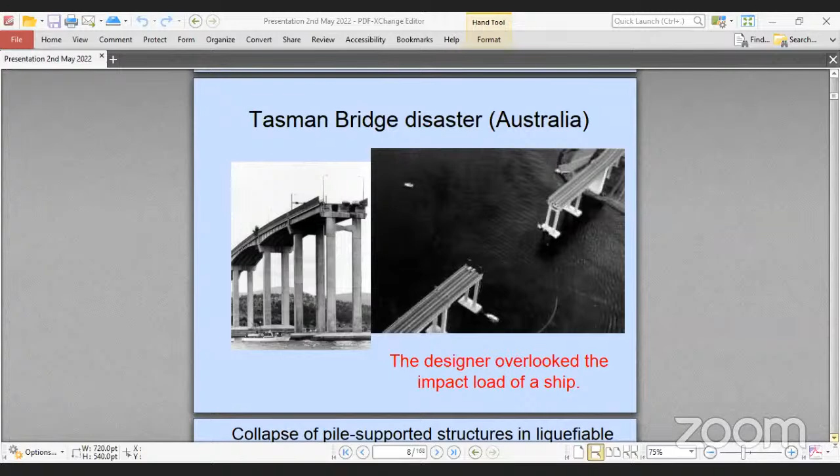Similarly, why I am giving this example, the very basic reason is that when we are doing the seismic design of any structure, whatever hypothesis available to us, based on that, the code was modified and we are using those particular codes. So my point is that every earthquake gives a new lesson, which is subsequently analyzed by the research community, and sometimes some particular hypotheses are being developed. So that's why there is no end to the concepts in seismic design of foundation, or you may consider a structure. Now, directly going to some of the case studies of seismic events, where we can see structural failures, especially bridge failures.

You can see this in different earthquake events. For instance, the 1964 Niigata earthquake, where the Showa Bridge in Japan collapsed just like anything. The central piers collapsed, right? Similarly, in 1964, another earthquake, the Million Dollar Bridge, also collapsed during the Alaska earthquake. Then there's the 1995 Kobe earthquake. And most importantly, in our country, the 2001 Bhuj earthquake also gave evidence of failure of some port structures which were supported by well-engineered pile foundations.

So this gives a lesson. This is why I am mentioning these particular earthquakes today. I will show you most of these case studies, which primarily give an idea about the lessons learned from the failures of these structures.

And today we are in such a position that, following these particular evidences of earthquakes, internationally our code has modified a lot. So till now, and in future earthquakes, for mitigating future earthquake events, a designer should be aware of some of the hypotheses which should not be missed out, considering the importance of the structure lying in the seismic zones.

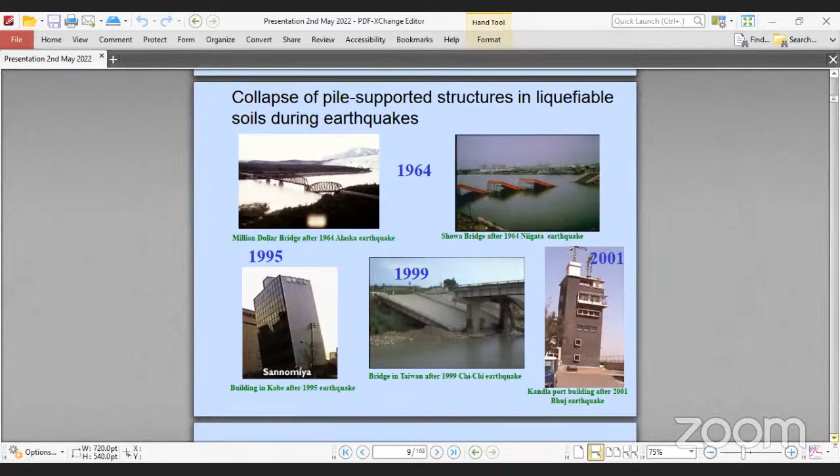With this, let me discuss some of the physics of the problem. All of you know that a building or bridge structure, a heavy structure, is supported on pile foundation. It may be an ordinary pile foundation, it may be a pile group foundation, whatever may be the thing.

Am I audible? Hello? Hello, am I audible? Yes, sir, you are very much audible. Okay, sir, you are audible. Please, sir. Okay, thank you.

So you see, all of you know this particular type of structure which is supported by well-engineered pile foundation. So today's talk, I will be mostly focusing on pile foundation. The reason is that the structures which are being withstood or supported by pile foundation form a very robust and well-engineered foundation. Even in soft soil, alluvial soil, these particular types of foundations are often used for supporting structures.

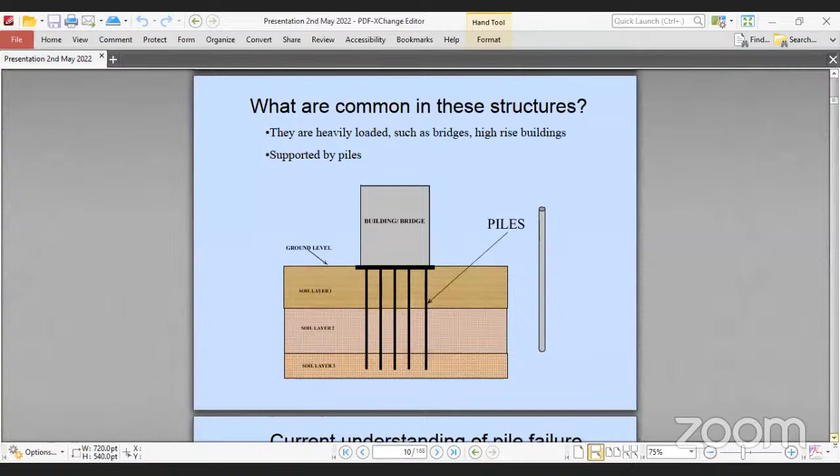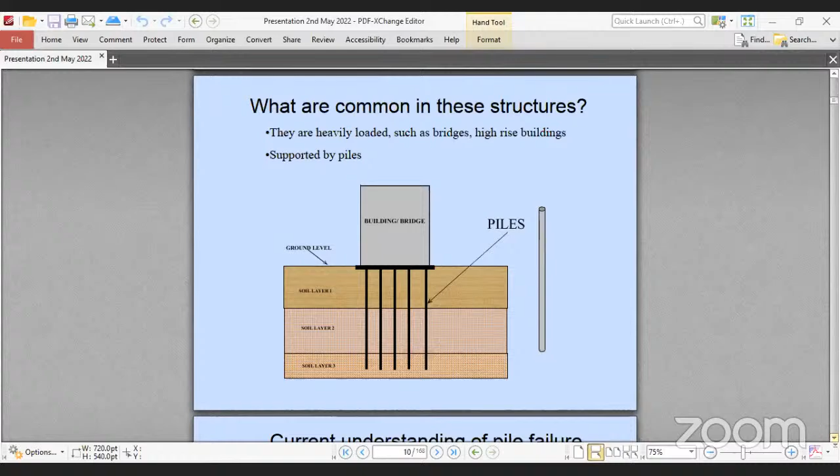So what is common in these structures? Pile foundation slender members are there, then supported by raft or sometimes a pile cap, and the building above. So a complex mechanics happens, a complex interaction, rather mechanics, I would say interaction, happening over here during this seismic event. This is a complete dynamic interaction going on over here. If you miss out this interaction, it is observed that the reason for failures is because of missing these interactions. This is one of the issues.

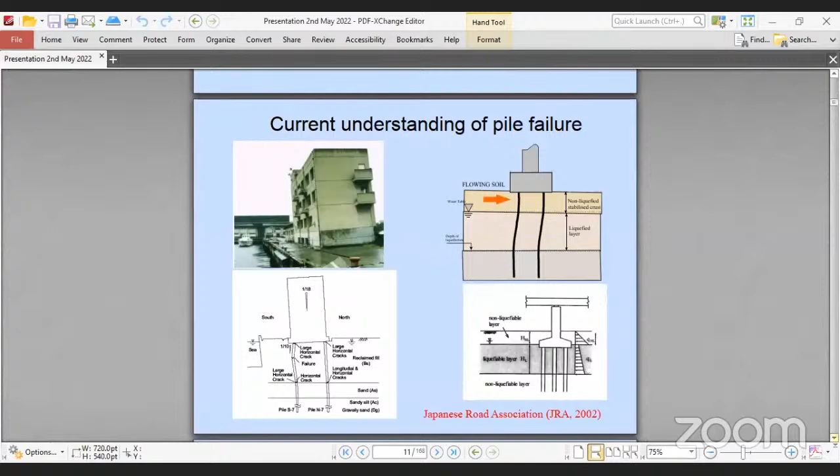So let us try to highlight this interaction part, the current understanding of pile failure, what the international code says about the failure, the present condition, present understanding. You see, if there is a deposit of liquefiable layer, hopefully you can see this is the failure of the Kandla port, or in case of Japan, I think this failure was observed, where you can see that a non-liquefied stabilized crust is there, followed by a liquefied layer.

In such cases, why has the reason of failure happened? Because some of the issues may not have been addressed earlier, and following this earthquake, this particular design provision has come up. You can see Japan first introduced this concept.

If you see the bottom figure, where if there is a presence of a liquefied layer, that depth is represented by HL. If there is a liquefied layer, then we should consider some thumb rule—they have given 30% of the total passive resistance we can consider as passive, because the passive resistance gets subdued when there is a liquefiable layer or liquefaction happens under certain conditions. And what happens?

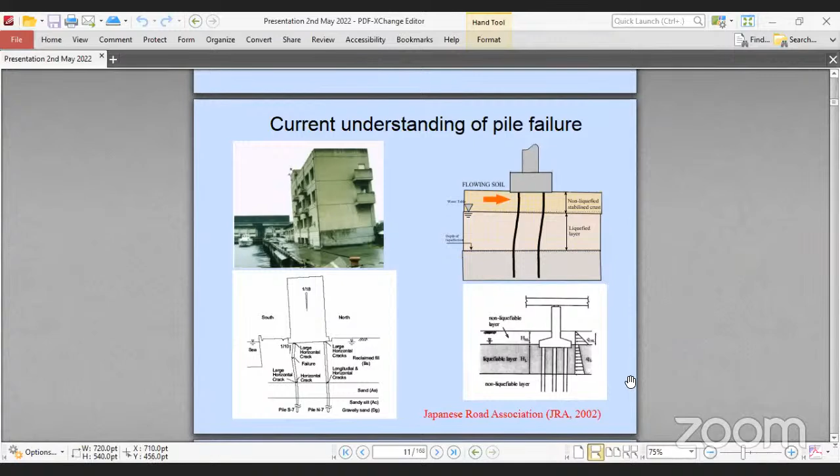This liquefiable layer gives additional stress on the pile, and the pile is generally not being designed for that additional stress conventionally, and that may lead to failure of such events, which you can see in the past.

Just following this particular slide, later I'll go in-depth into the matter. The Japanese code in 1996 identified the problem of the liquefied layer, where foundations are being designed considering 30% of the total overburden pressure as the lateral resistance. But ultimately it is found that this lateral resistance is questionable, which was published in 1996. So 30% of the total overburden pressure, right?

So presently people are arguing that this pressure should not be there and there will be no passive resistance, something like that. So if there is a passive resistance, generally a bending mechanism is going to happen. If you just forget about the passive resistance, then obviously the bending resistance will not come into picture.

I don't know why it is coming. Just a minute.

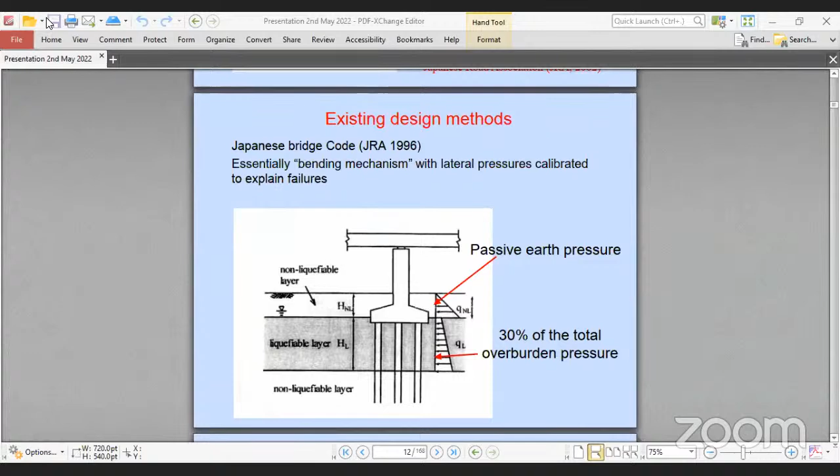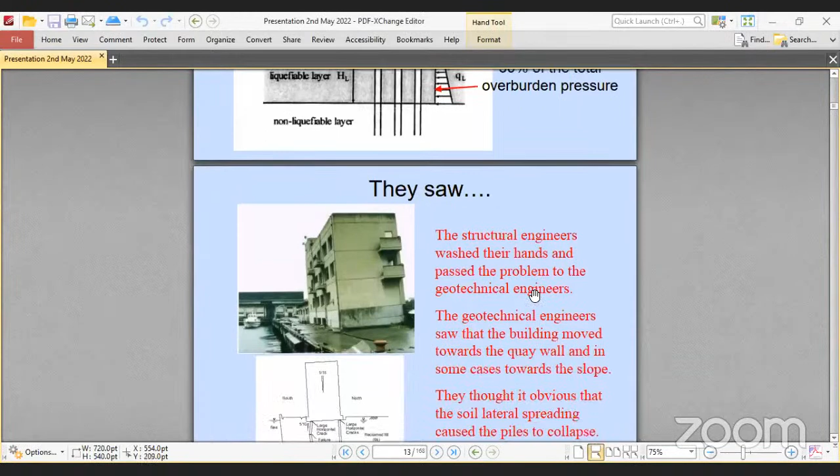Okay, fine. So these are the issues they saw. The structural engineers washed their hands and passed the problem to the geotechnical engineers. The geotechnical engineers saw that the building moved towards the quay wall and in some cases towards the slope. They thought that the soil lateral spreading caused the piles to collapse.

But actually, some of the mechanics that people identified after this Japan earthquake failure led to one term: lateral spreading. Lateral spreading is an event where if there is the presence of a liquefied layer, or over the top a non-liquefied layer which is lying on a slope, that gives a huge moment on the pile, a bending moment. That is called kinematic interaction.

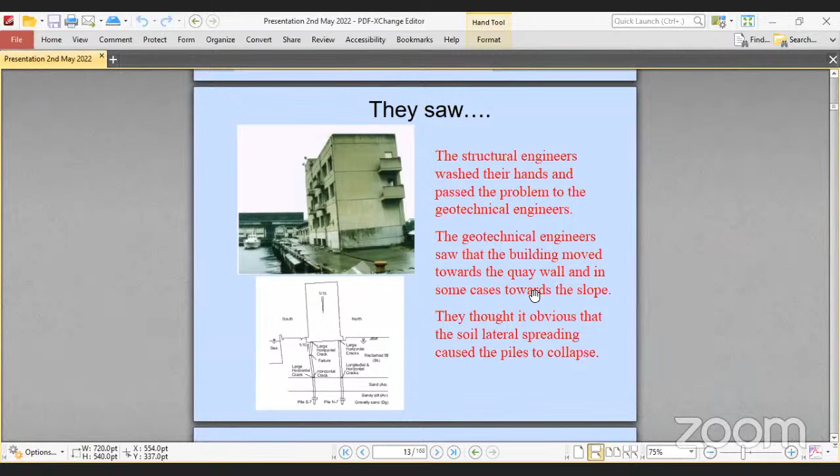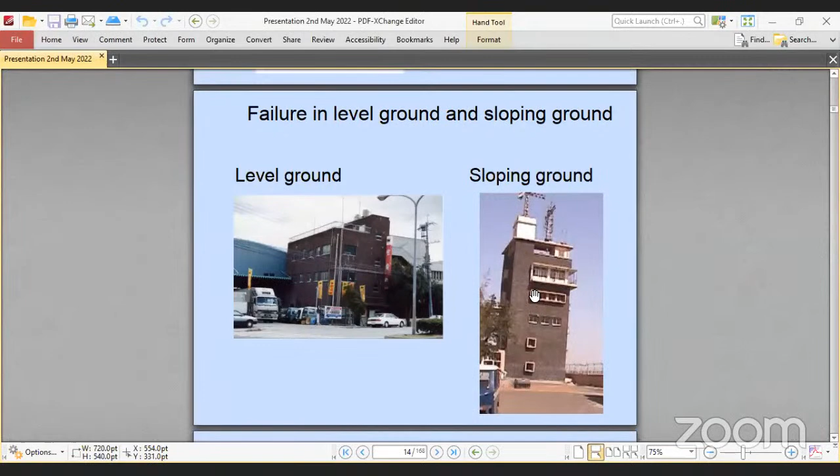So failure occurs in level ground and sloping ground. In level ground also we have seen several failures. In sloping ground, you can see the example of the 2001 Bhuj earthquake, which evidenced this kind of failure, caused by the subsidence of the pile, sudden subsidence of the pile at the bearing level.

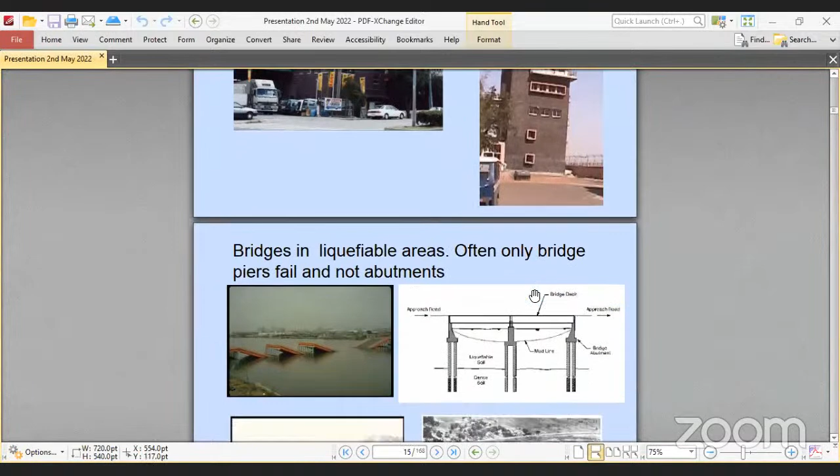Now, in bridges in liquefiable areas, often only the bridge pier fails, not the abutments. If you categorically observe these failures, the Alaska bridge failure during the Alaska earthquake, and the failure of the Showa bridge during the Niigata earthquake, the observation is that the abutments have not failed. Interestingly, the central piers have failed. So obviously people are curious about that.

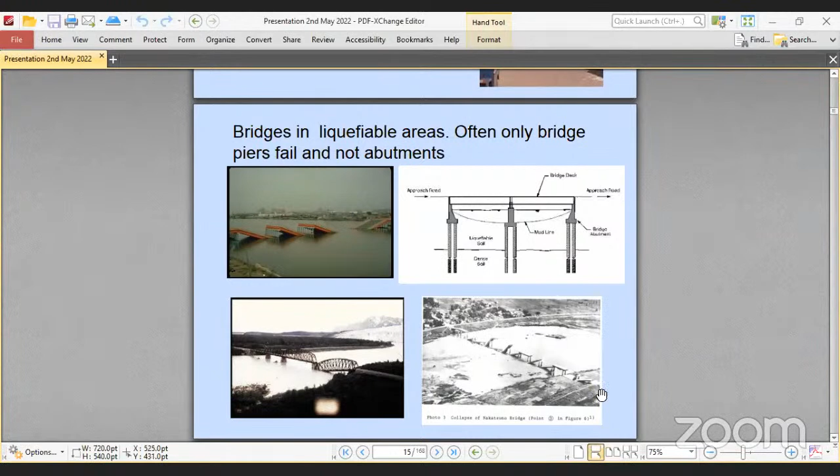What is the reason? You can see this figure is an old figure. In the Niigata earthquake, the central piers failed, not the abutment level. So people have tried to investigate the reason, and different schools of thought are available today with us.

Now check the factor of safety against JRA. JRA means Japan Road Association, which has given some basis of analysis for how you find out the moment capacity of the pile based on these assumptions. They checked, and found that conventional code cannot define the failure.

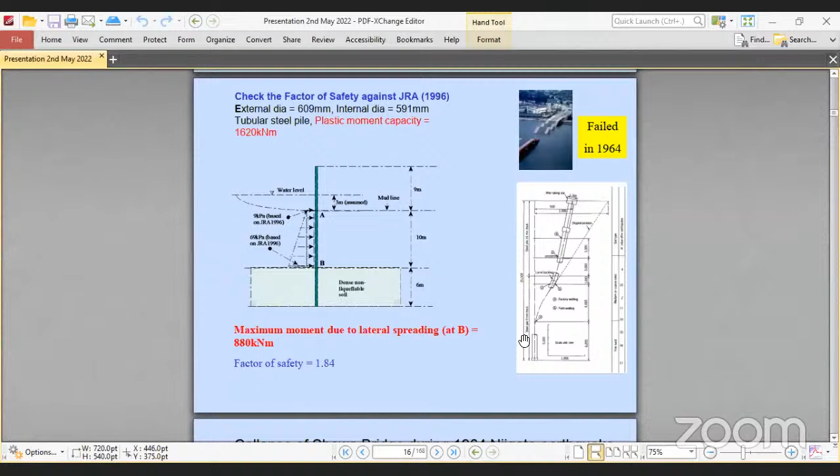Rather, some additional analysis has shown that there are some gaps which alone cannot define the failure mechanism. So finally, it has come out that some missing links are there.

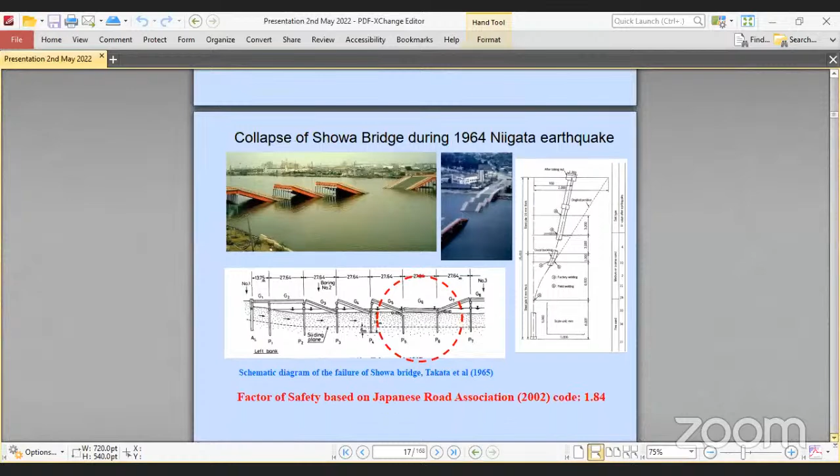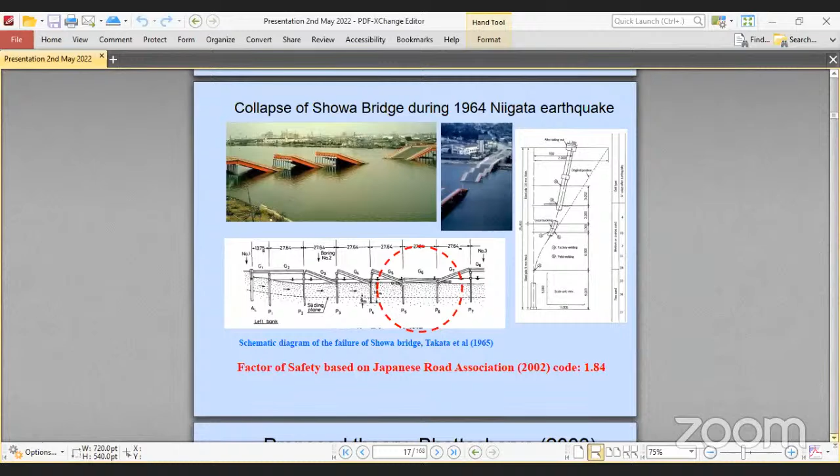You can see a good photograph over there, from the 1964 Niigata earthquake. This failure, you can see, the central pier has collapsed. There will be material failure of the piers, I mean the piles, the steel piles.

Now, based on these failures, Bhattacharya has done a lot of research in this direction. They have tried to give several ideas about the failure of the pile foundation, from which some design guidelines have been framed. The first figure is showing...

if the particular subsoil layer is a loose sand deposit over which some non-liquefied crust layer lies, considering only static loading, then obviously the pile will generate skin frictional resistance and end bearing resistance, based on which the total structure will be supported.

On the other hand, if you consider the dynamic loading during seismic excitation, if liquefaction gets started, what will happen? Stage 2: shaking starts, soil yet to liquefy, pile acts as a beam member. Stage 3: soil has been completely liquefied, inertia forces may act, and the pile acts as a column.

So the question is, when do you consider the pile acting as a beam, and when does it transform from beam to column behavior? This depends on when the sand has been completely liquefied. So there is a transformation of understanding after these theories came up.

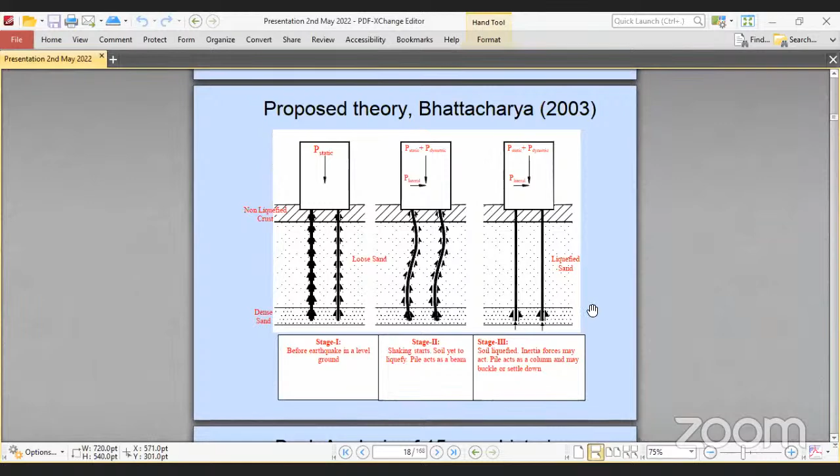So what actually Bhattacharya wants to convey - afterwards he has shown back case studies. Several case studies are represented here.

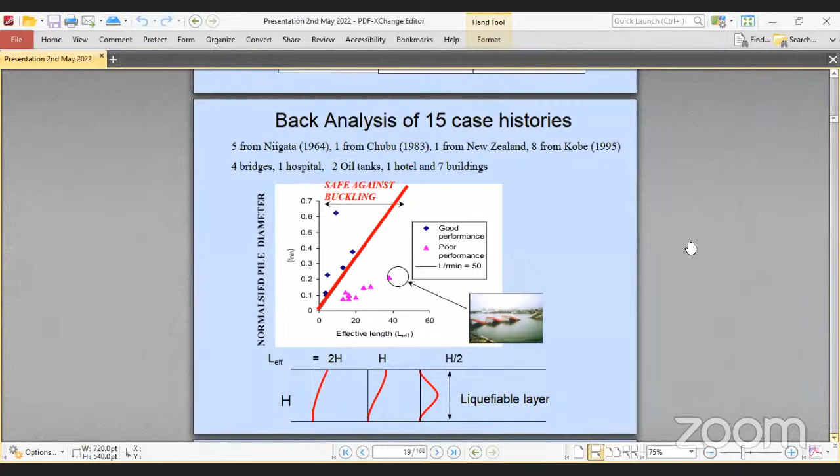Yes sir, okay. So back analysis of 15 case study failures was taken, and they identified the diameter of the pile, effective length consideration, and radius of gyration, trying to segregate two areas: poor performance of piles during earthquakes and good performance. From that they identified the effective length of the pile, and based on such criteria, they are safe against buckling - beyond this red line zone, it's not.

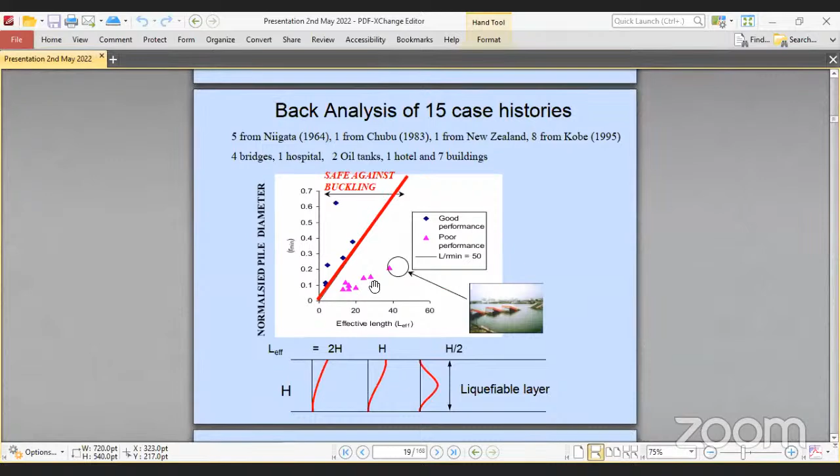These are several theories they have given. Based on this theory, yield stress versus effective length L graphs were prepared to identify good performance and poor performance zones. Euler's theoretical curve for M25 concrete - this red line shows Euler's theoretical line, basically to help understand the buckling theory.

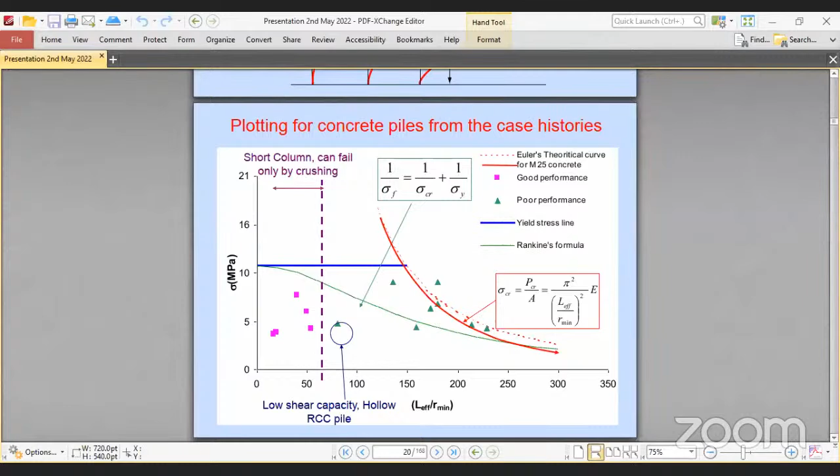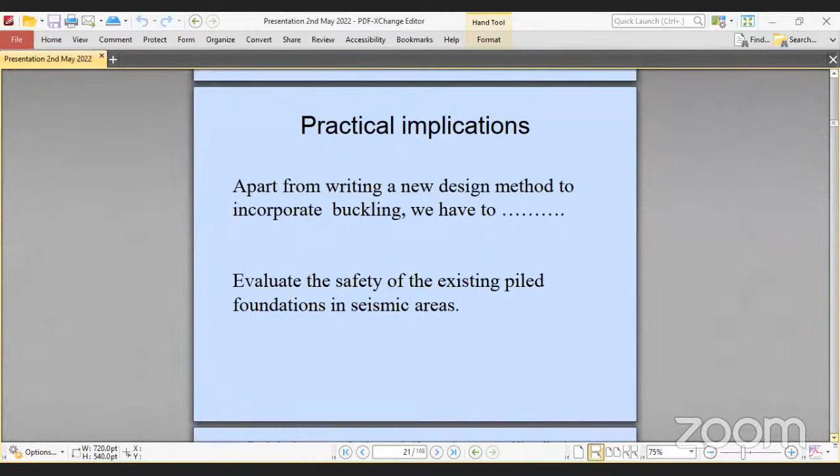Next is practical implications. Apart from writing a new design method to incorporate buckling, we have to evaluate the safety of existing pile foundations in seismic areas. Now, criticism of the buckling instability theory was also made in several research studies.

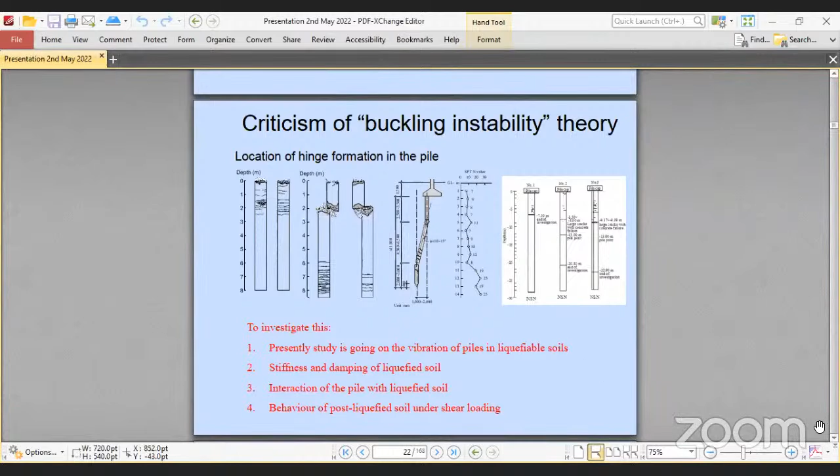What exactly it states about buckling instability is why the piles are failing - we are defining the pile failure as buckling. A group of people do not understand this particular mechanism; they say buckling is not possible for such a solid pile, and that there will instead be some flexural kind of failure. So there is criticism of the buckling instability theory, and they try to frame it as shear failure or flexural failure. So there is a debate, right?

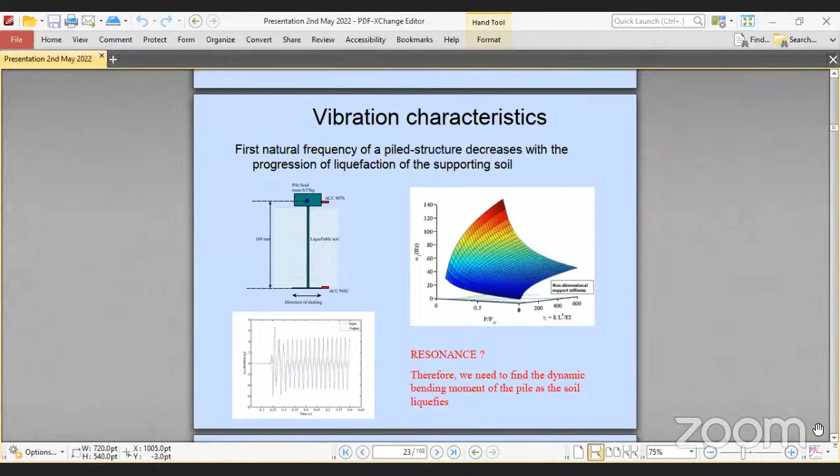Now, if you see the vibrational characteristics of pile foundation in liquefied soil, you will find a significant zone where natural frequency Omega 1 varies from 20 to 140 hertz - that is the extent of increase in time period, ratio of P by P critical. Therefore, we need to find out the dynamic bending moment of the pile as the soil liquefies - dynamic bending moment is important.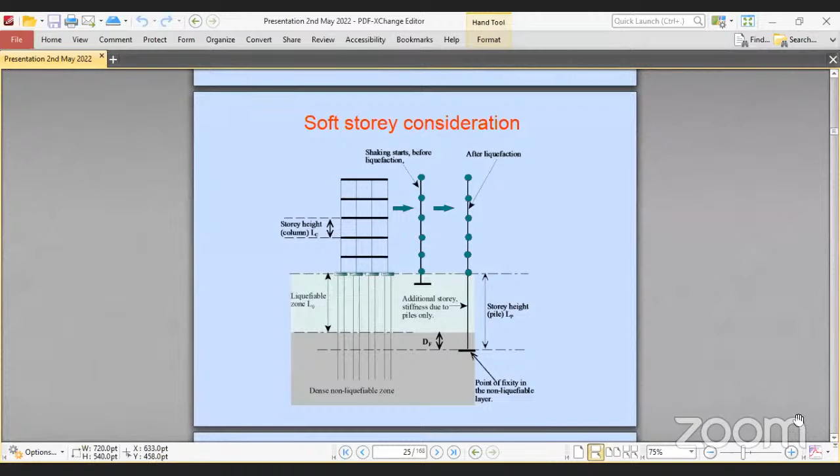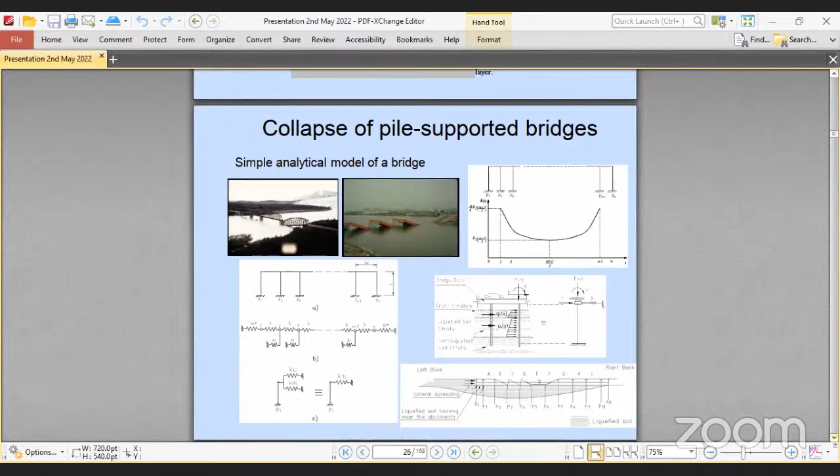I have mentioned these theories analyzed for pile supported bridges. Post analysis was made using these idealizations, and people tried to identify the mechanism behind the failure. They ultimately found that some understanding about the complex interaction mechanism was missed during the design of these bridges, which was the main reason for the failure during the earthquake event. Afterwards, the codes were modified keeping in view the lessons from these earthquakes, including bending, buckling mechanism, and lateral spreading mechanism, which was not earlier in the code. Depending on this, future work was planned out.

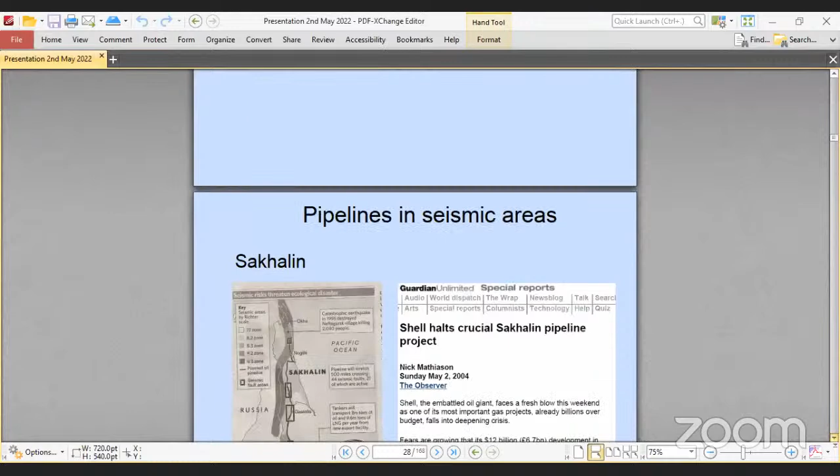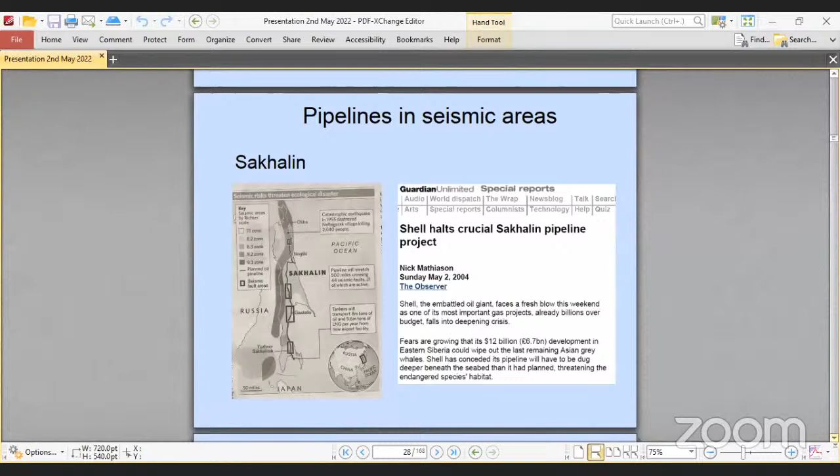So, pipelines in seismic areas - this is very important when you are considering any seismic area. Suppose you are going to design a pipeline, and it has to pass through a seismic region. What precautions do you have to take care of while designing? So when designing any structure in seismic areas, you should look into several aspects. I'll show you other aspects also, just quickly.

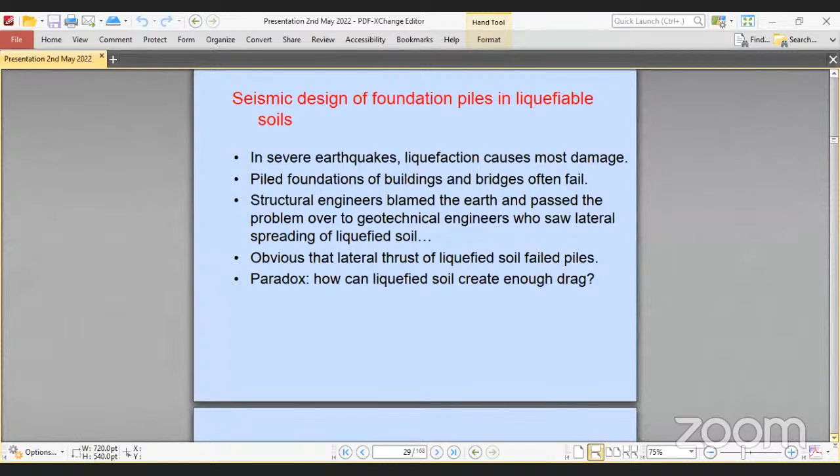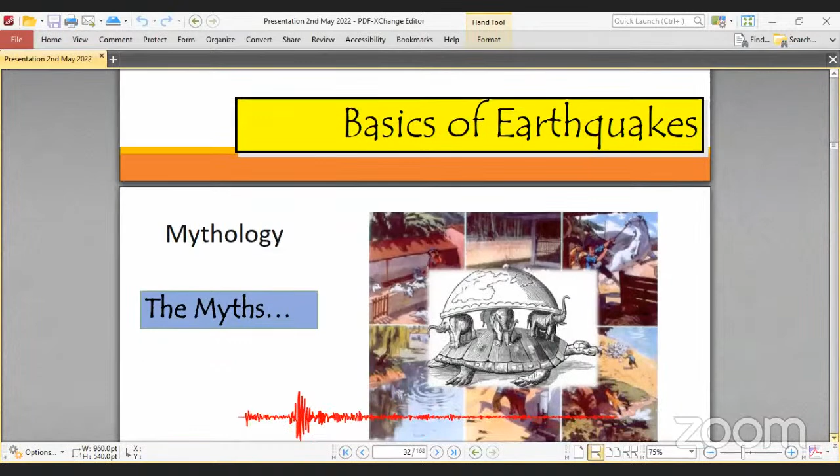Okay sir, sure sir. So just giving a touch about the basics of earthquakes from this point of view. Just now I have shown you some case studies and the advancements made in design concepts. I think the audience will be very happy to hear the basics of earthquakes. I'm not giving much time on the basics, but just telling you some things about what exactly people understood about an earthquake in very ancient times - the myths, the mythology behind earthquakes.

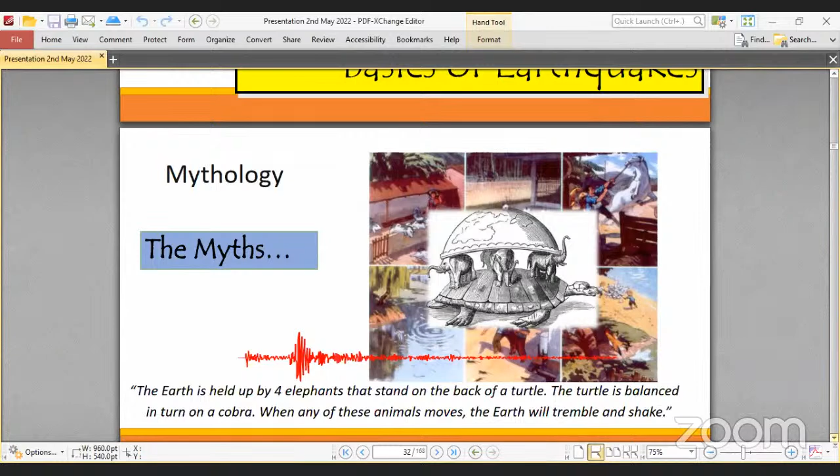This is a very important slide. I found that people in ancient times understood that the earth is held up by four elephants that stand on the back of a turtle. The turtle is balanced in turn on a cobra. When any of these animals moves, the earth trembles and shakes. That was the concept in ancient times. But truly, the mechanics science is something different.

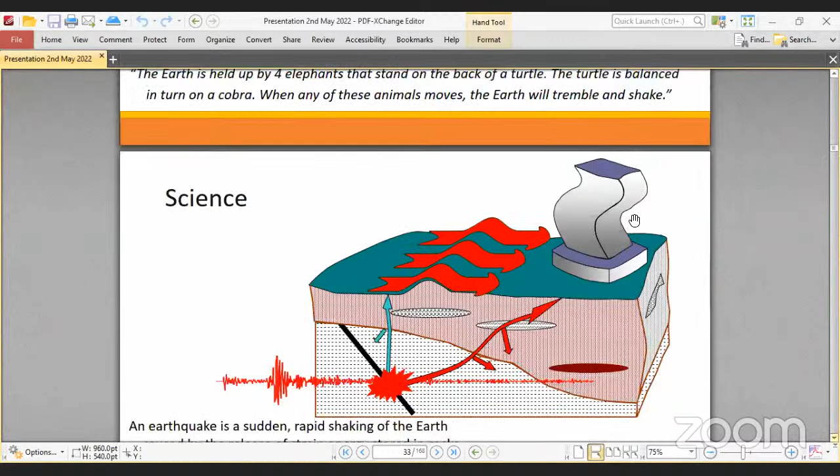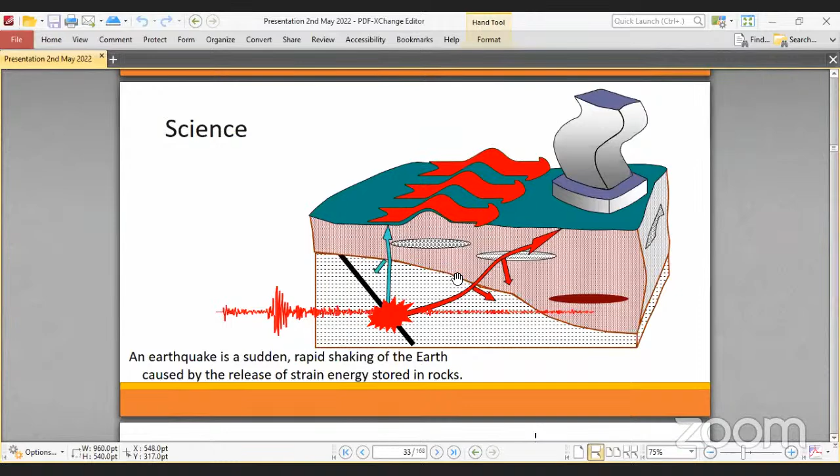I hope you all understood these mechanics. An earthquake is a sudden rapid shaking of the earth caused by the release of strain energy stored in the rocks. All of you know the basics of the origination of earthquake energy, so I'm not going into much detail about this. Let me go to some of the mechanics.

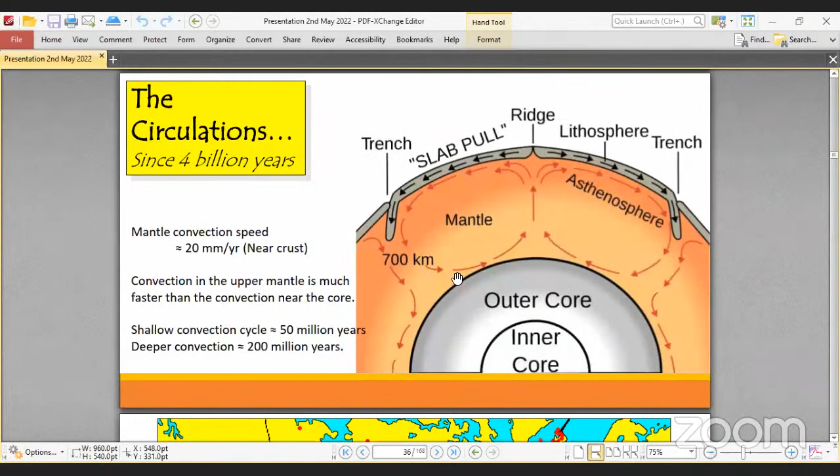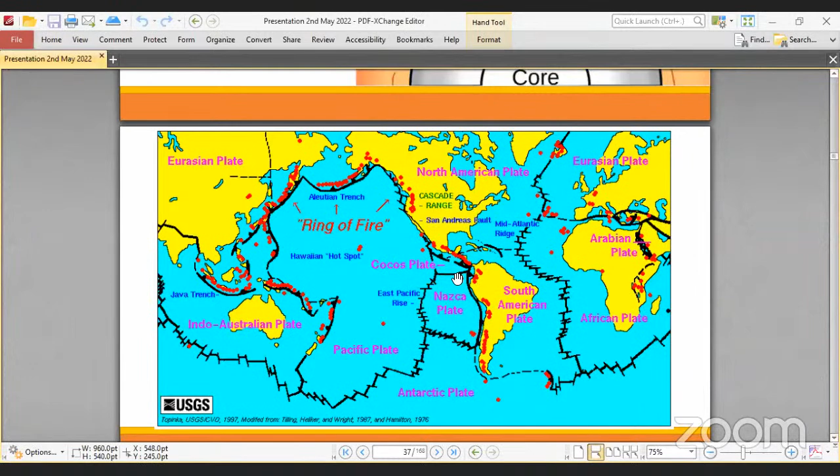I'm just skipping these slides on layers of earth and how the earthquake occurs through convection energy - I know all of you know these parts. More important is the seismic zones, the rings of fire, which is the part of our world where maximum earthquake activity happens. These rings of fire are important in deciding the design of structures in these seismic areas. So I'm skipping all these basic things.

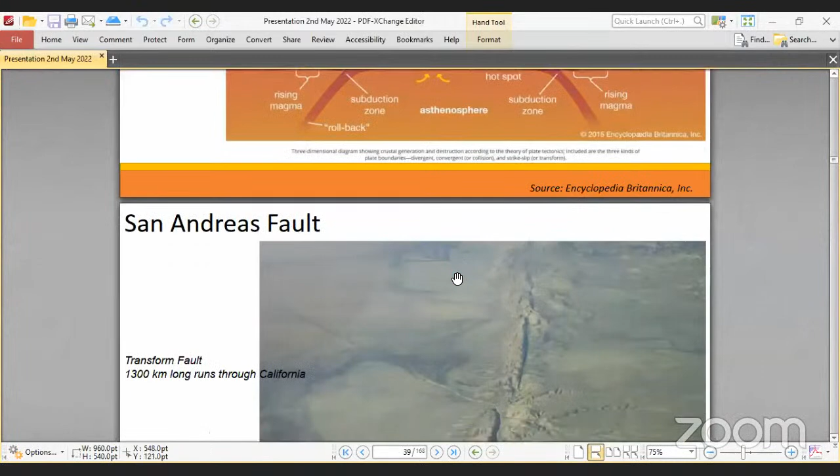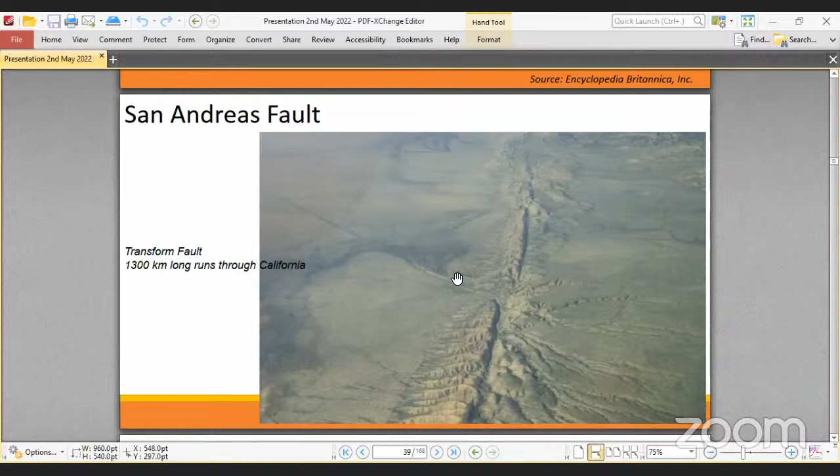I hope you know - this is a close picture of the San Andreas Fault, lying near California, which people used to go see. It's a tourist spot also. People used to go to see this active fault, which is visible by the open eye. It's a very lively active fault which you can visibly see, something like that, you can see over here. So I'm just skipping this part.

Now I'm coming to the seismic hazards. If you quantify the seismic hazards, what are they? The probable seismic hazards people have understood are: first, seismic shaking - how the shaking varies from place to place; then liquefaction; then permanent ground deformation caused by lateral spreading, landslide, or faulting. And finally, we have also experienced the event of tsunami during an earthquake. So we should know all these hazards, and how to cater to them or mitigate them from the point of view of designing the structure.

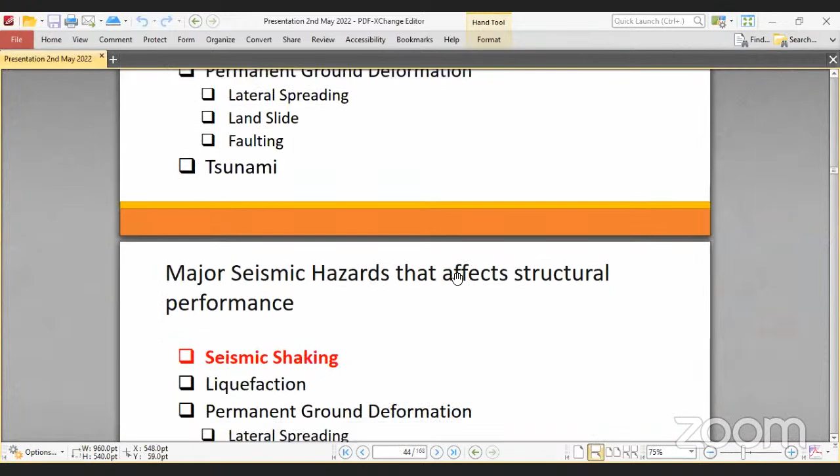So, major seismic hazard that affects structural performance will be seismic shaking. Now let me go to the seismic shaking part.

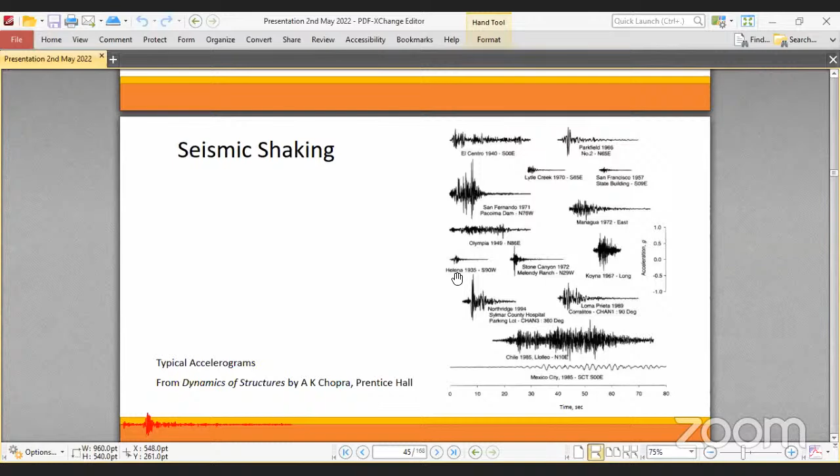The reason is basically when the waves are passing through different soil mediums, they get attenuated. This occurrence of seismic forces will be different from place to place for a single earthquake. That is the understanding of this figure, the seismic shaking.

Quickly, I'm just passing through this slide, which is a repetition. How to find out the location and magnitude of an earthquake—there is a basis for it, but I'm not going to discuss it in detail. From a signal, from the P wave and S wave, geophysicists calculate the epicenter of the earthquake and the probable magnitude after studying the whole signal. First the P wave comes, then obviously the second, the shear wave.

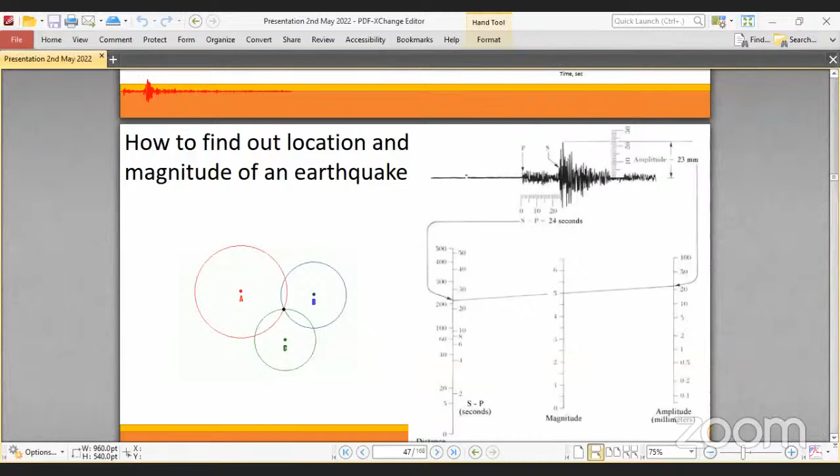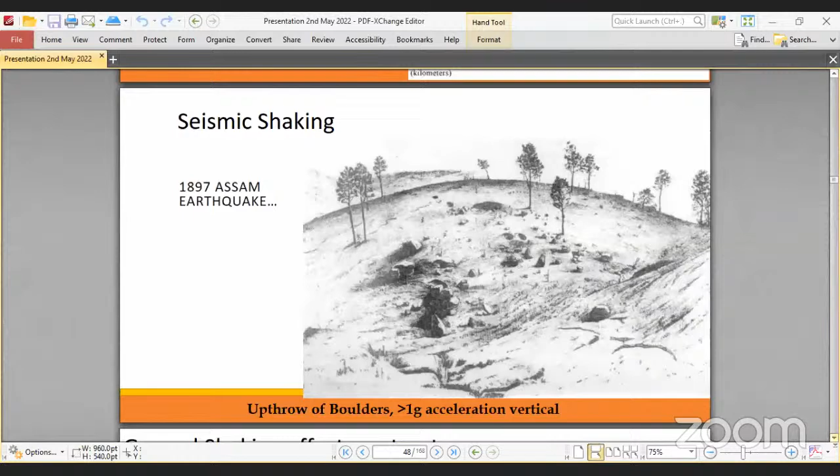Next, quickly, I have to finish—that is a very important photograph. We find that in 1897, there was a mega earthquake, more than 8 magnitude, the Assam earthquake. What people observed was an upthrow of boulders greater than 1 G, meaning boulders were thrown up because of this vibration. Can you imagine, just near the epicenter? So this was the tremor, you can see and understand.

Now, ground shaking effects on structures. If you see, there is a big plus symbol. On the left hand side, ground shaking effect on the structures shows that ground shaking causes the structure to vibrate because of inertial involvement. All of you know that dynamic forces involve one of the major forces, the inertia force.

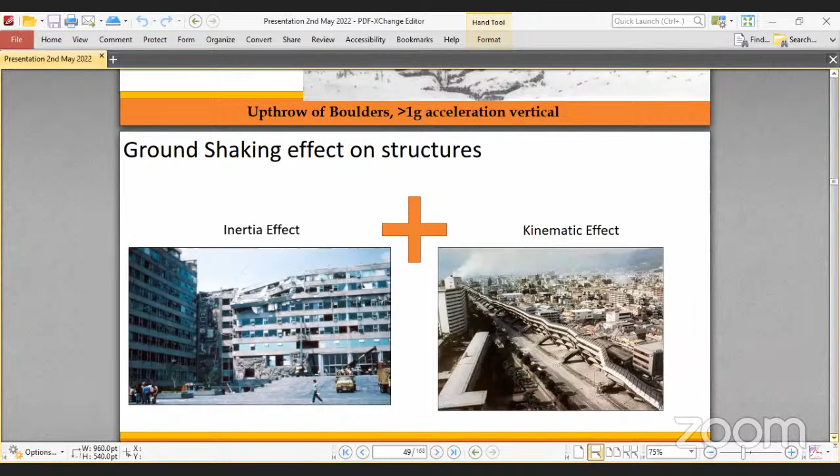On the right hand side, another category of structural failure is found, quantified as the kinematic effect. So there are two effects when the ground shakes a structure: one is the inertial effect, another is the kinematic effect. If I get time, I'll try to discuss this further—I'll be happy to.

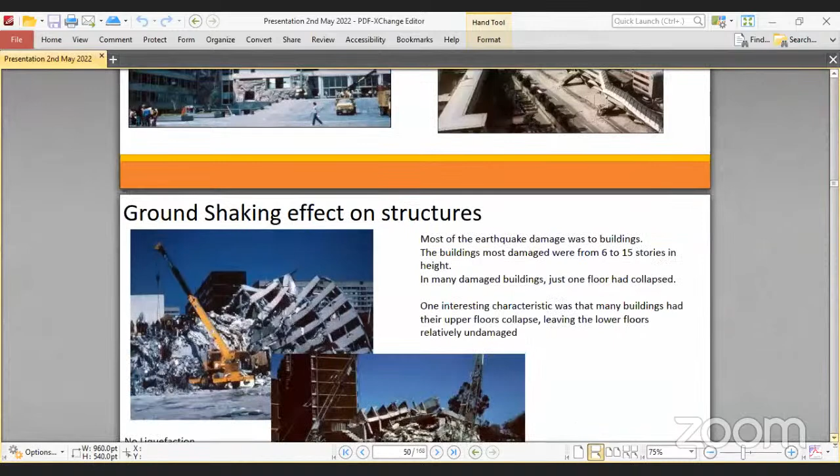Now, what is the ground shaking effect? This clearly indicates a picture of the Mexico City earthquake, shown here as a case study, where we can see complete damage of a particular structure, a building of about 6 to 15 stories in height, severely damaged.

What people observed: there were no liquefaction cases, no active fault or faulting present, no landslide—some settlement could have been observed. So what is the reason for such failures? Ground shaking effect caused this particular failure.

That means the motion at that particular zone had characteristics that tuned up with, or created a resonating condition with, the natural period of the structure, and the ground period got messed up with it. So that was identified as the reason. Ground shaking effect is an important issue when designing structures.

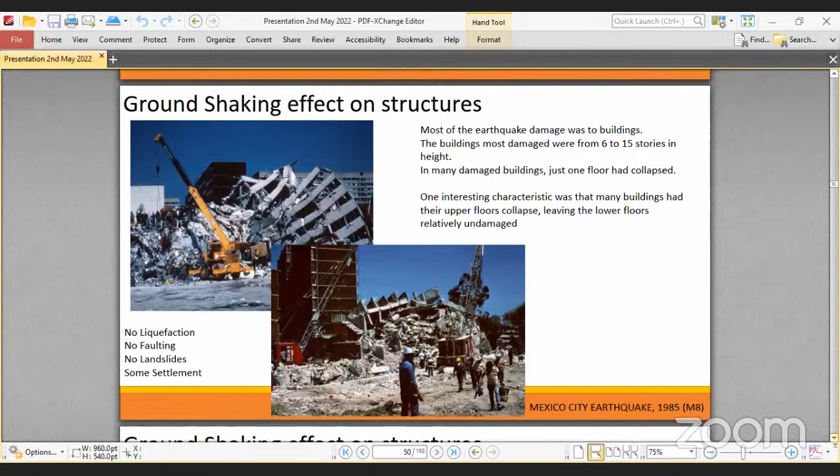Now you can see the Mexico City earthquake in close view. A soft lake bed deposit under Mexico City causes large amplification of ground motion—this is called a local site effect. You can see the profile at the bottom: one side is a hill zone, and the other side is a bed of volcanic ash and soft clay layer.

What happened in Mexico, a place of earthquakes, is that the waves could not dissipate out because of the hill part. The boundary condition was very rigid, so the energy got entrapped into the soft soil bed, the lake deposit, and because of this higher energy, it hit the structures. Those particular structures, 6 to 15-story buildings, were damaged.

It was mentioned that 2-second period structures got a resonating effect. What happened was the ground motion got sufficiently and significantly amplified such that the 2-second period structures resonated or got tuned up with the motion at the bed level.

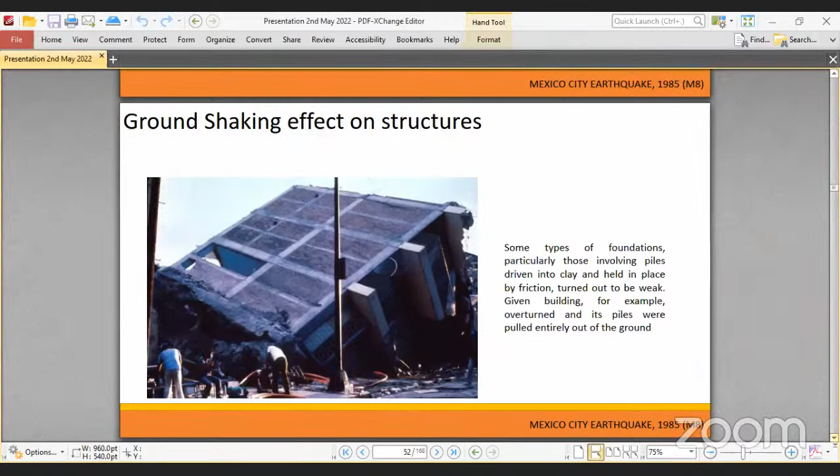So this is quite interesting. These are the examples showing ground shaking effects on structures. A complete pile-supported structure has been uprooted. It was found that the piles were designed as friction piles to support the structure, and because of this ground shaking effect, it was uprooted. Now you understand what kind of failure can be anticipated from such earthquakes.

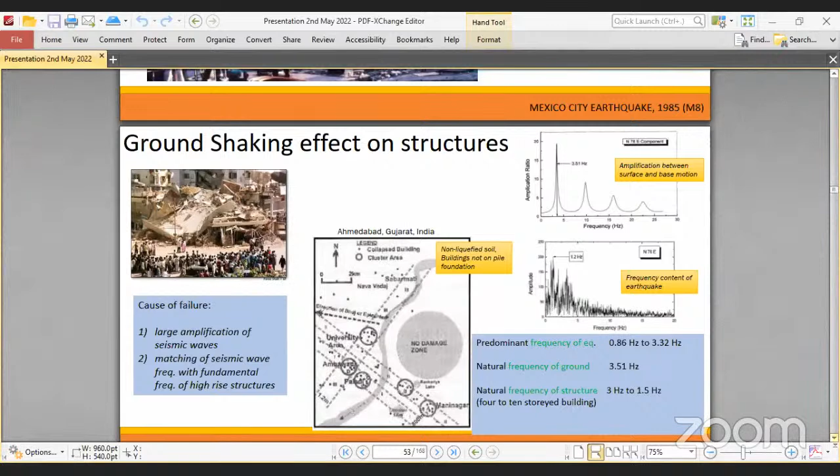Now, just looking at ground shaking effect on structures, there are a number of cases out there. I think this is the case of Ahmedabad buildings where in the Bhuj earthquake, and several other earthquakes, we have seen ground shaking effect has caused particular structures to fail. For a particular period of structure, failure occurred. So I think I should stop over here with ground shaking effect.

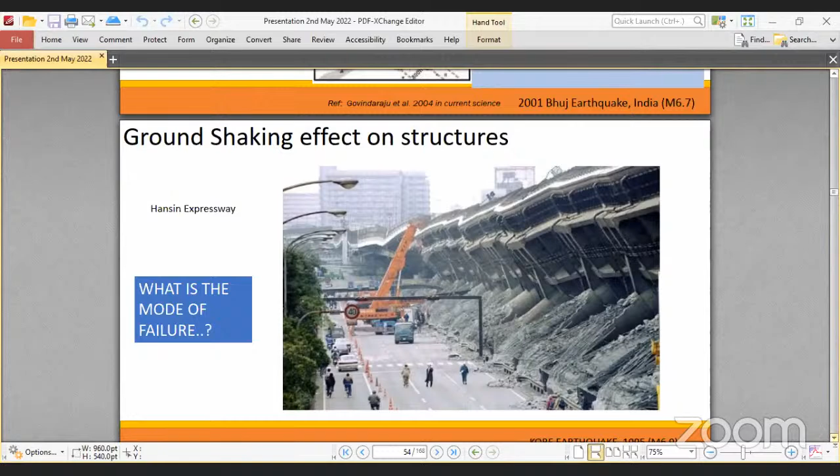Obviously, people have asked what is the mode of failure for such failures, like the long expressway called Hanshin Expressway in Japan. What is the reason? Because of ground shaking, there might be some variation in the ground shaking caused by the particular earthquake. So it was identified that soil-structure interaction was missed out in this particular analysis, and they reported 25% higher response when you consider the soil-structure interaction. So soil-structure interaction was another important missing link in the design before this 1995 earthquake, which was finally quantified in the design codes and addressed accordingly.